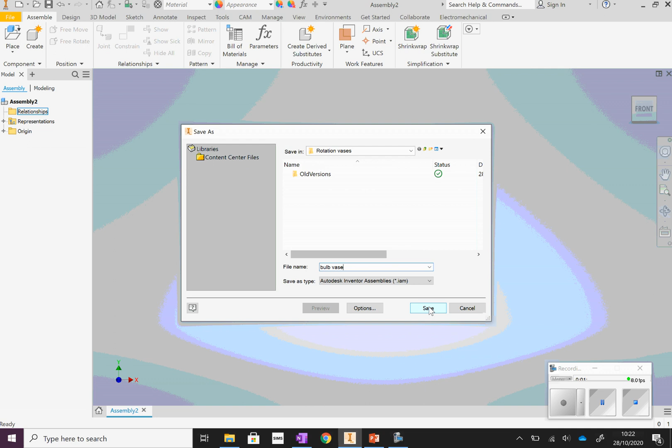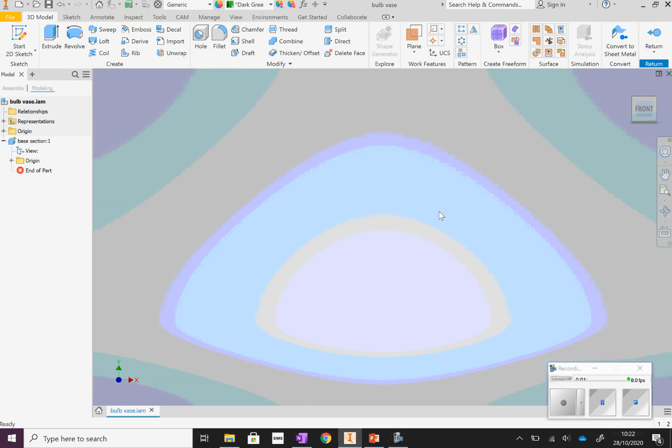There we go. So we're going to create 2 separate pieces. The first piece we're going to create the base, so I'm going to call it base section. Make sure it's saving into my rotation vases area. And remember, when you see the little sketch icon, click, and it will come up with your section here. So start a new sketch.

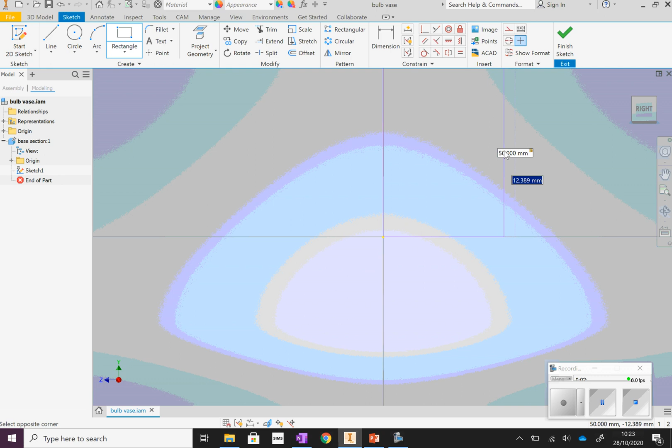I'm going to draw on the side. It doesn't really matter what shape you do the base section in. What does matter is the top bit, but I suggest we go up by 50 millimeters high and then do the width. Remember, it has to be a maximum of 30 because it's going to rotate and become 60 around.

So this section here is what we can draw inside. Remember, you've got to leave a flat bit at the bottom for it to stand on, and we also need a flat bit at the top so that we can have our top section slot into it.

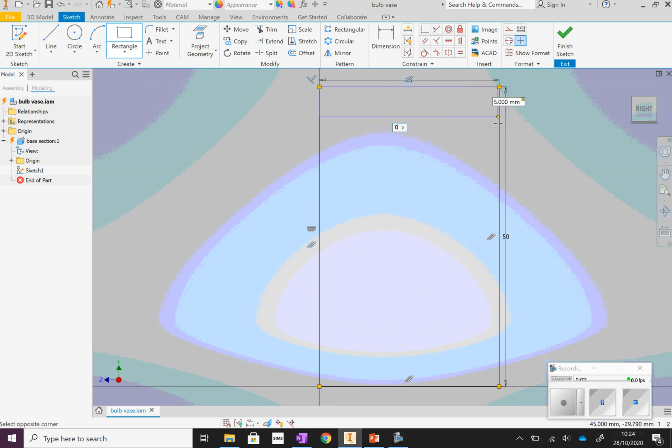So what I suggest you do is click in this top left corner here and then come down - you see the blue dimension changing at the top. I would come down by 5 millimeters and then make sure that says 30. So we're going to leave this section as a flat section that comes down here so that we can then slot the top bit in and it'll make it nice and easy to join up.

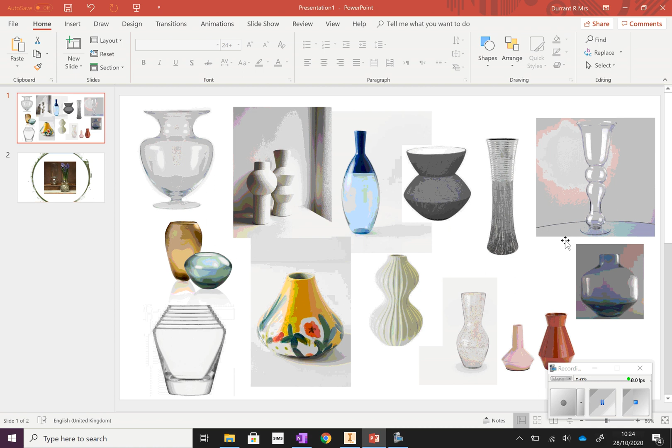Okay, so we could do all sorts of different shapes. This one is a circle. It doesn't have to be turned into a circle - you could turn it into one of these squash shapes, something square. It's up to you, though it's not very much space.

I think what I'm going to do is make mine into a more interesting shape. I'm going to go from this bottom part here out to about the middle, and then go from there. If you hover underneath that dot, it shows you a little dotted line - that will help if you want to make it symmetrical, so you can go across at the bottom and it'll show you the dotted line so you know you've got them the same distance from the side. I'm going to do that and make mine a little bit interesting.

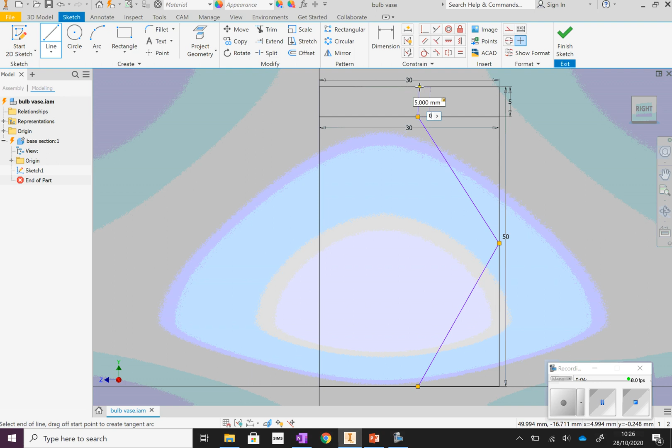Now, wherever you end up here across the top, go with your line tool from there straight up - it wants to be 5 millimeters, the same as the side. Can you see here it says degrees? We don't want it to be wonky; for it to work, it needs to be perfectly straight up, so you want to set that to 0 degrees. That will give us a nice straight edge for the top section to slot down into.

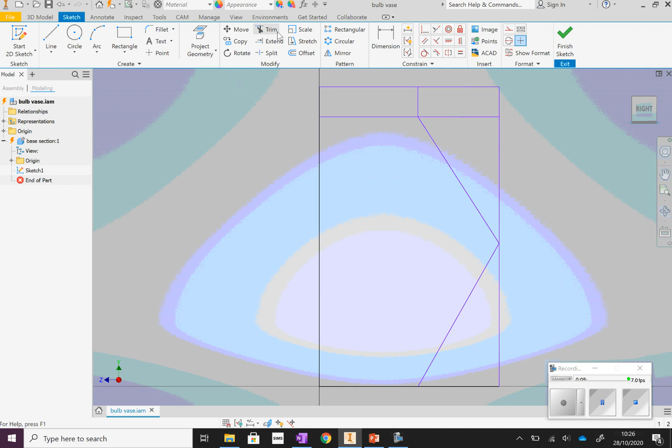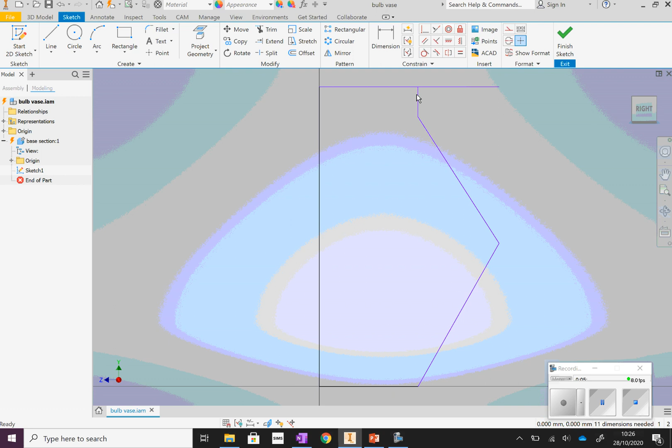Okay, so let's start trimming the excess away. Not sure why it's doing that - let's see if it behaves when we go on to do the revolve. I don't know if it will or not.

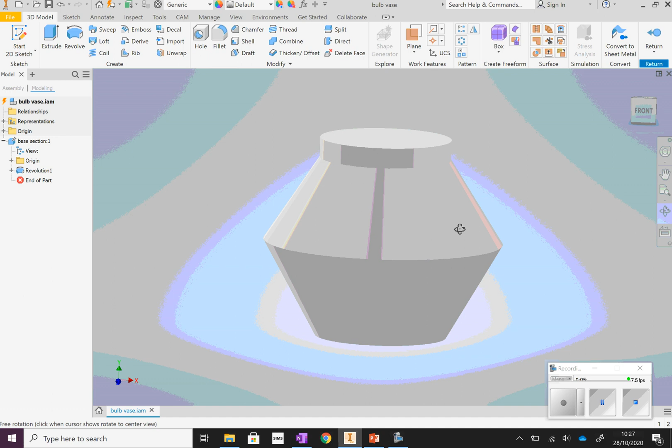Yeah, it's working anyway. So we're going to revolve that profile, and the axis is going to be this centre bit. There we go. So this is my bottom section - if you look at this again, this is the equivalent of this round part here.

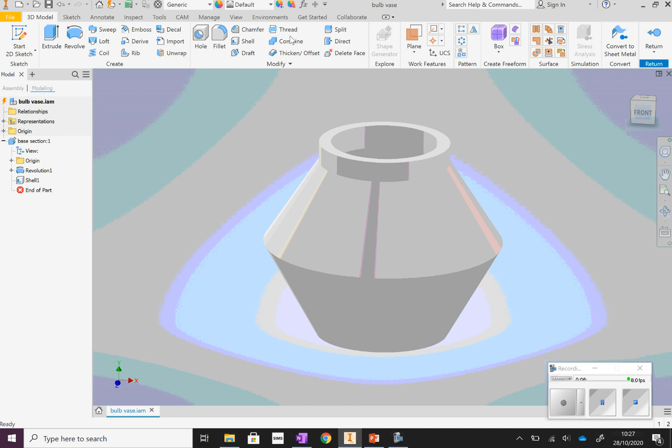And we need to shell the middle out, so 3mm, and we need to make sure that this is nice and easy to see through. So I'm going to set it to one of the clear colours.

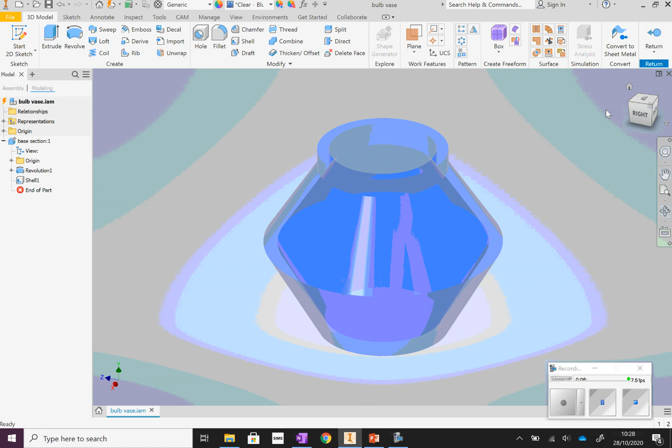Okay. So that is my awesome see-through base section. Now we're going to make the bit on top for the bulb to sit in. Right, so I've skipped ahead a little bit here. So I pressed the return button and I've created my next part. So I've called it top section and I've clicked on here.

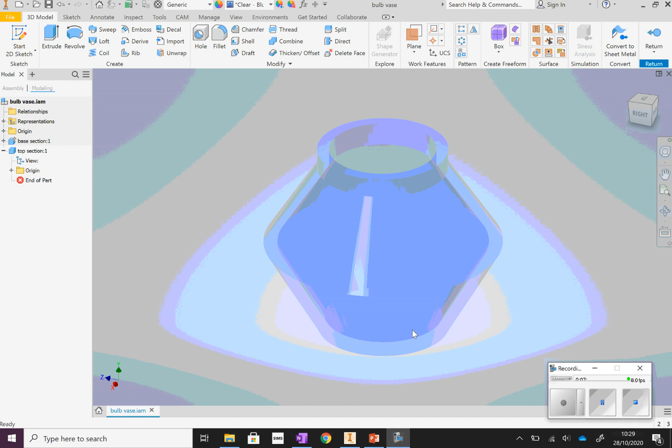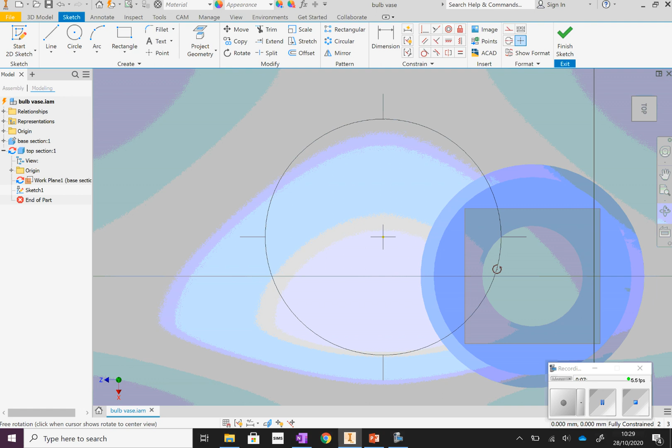And as you can see, I can still see this bottom part. So we can actually use that to create the top section and make it an exact fit. So you want to click on Start a 2D sketch, but we're actually going to click, rather than on this set of planes, on the actual product itself, on this section here. There we go. So this is us drawing. If I flip it, we're drawing on the top of the base section.

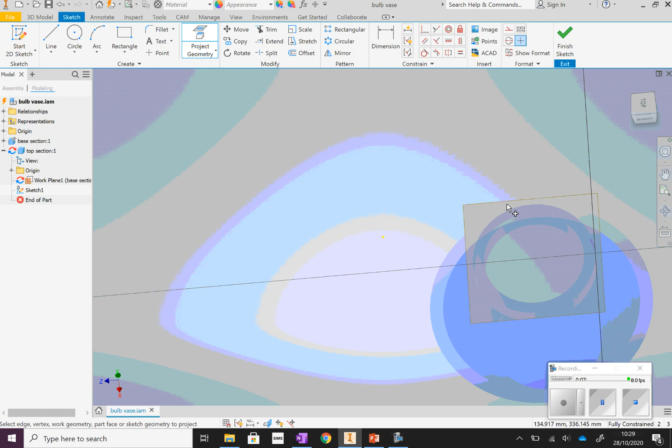And we can use this tool up here called Project Geometry to steal lines off this bottom bit to make it exact. So if you click on Project Geometry, you can see we can steal these lines here. And the one we want is the internal bit, the inside of that circle. So if I show you here, you can see that what we're going to do is make something that fits inside here. So click on the inside of that section, and then we need to create a slightly bigger area around the outside so that it doesn't fall in.

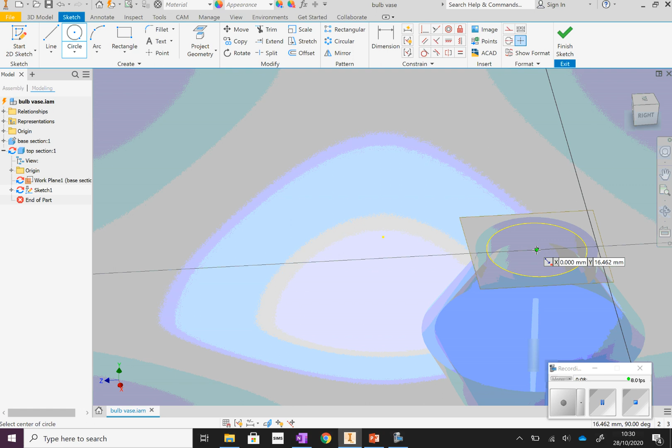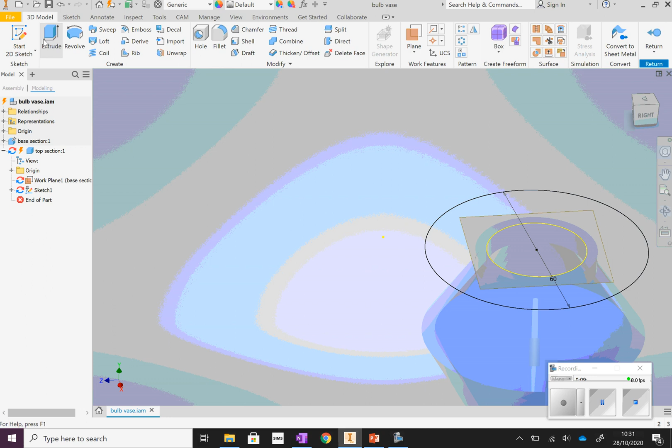So I'm going to create a circle. Make sure you hover over this middle bit here so that it is exactly in line with that circle. So you want to wait for the little green dot to show up. Click, and then we're going to type 60mm because that's the biggest size we can get. Okay, now that is going to be our bottom section. So I'm going to click Finish Sketch. I'm going to extrude this, but I only want you to extrude it by 3mm.

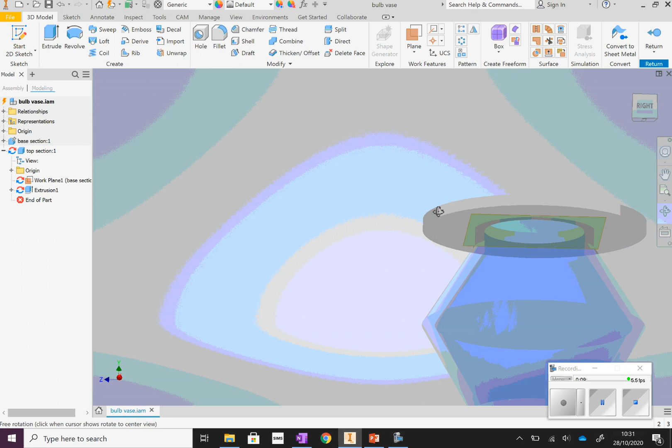Now that, as you can see, fits exactly on top. Okay, what we do need though is to make a section that slots down onto the inside. So start a sketch, we're going to draw on top, and we're going to steal that line again. So Project Geometry, we want the inside of the circle, but this time you're going to do an offset line. Now offset exactly copies this, but you can set it to a different dimension. You can drag it like this, look, or you can just type a number in. So we want to type 3mm and press OK.

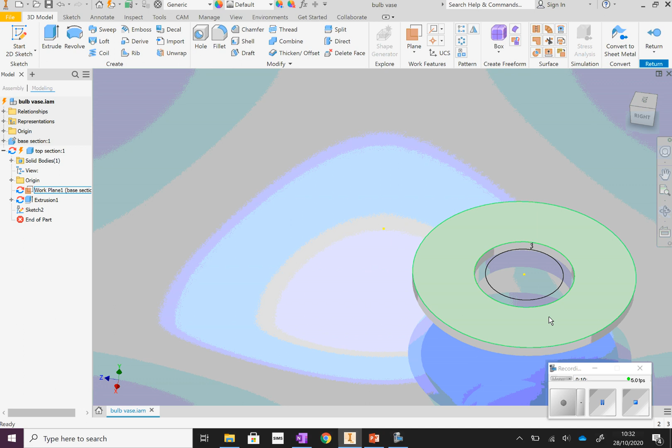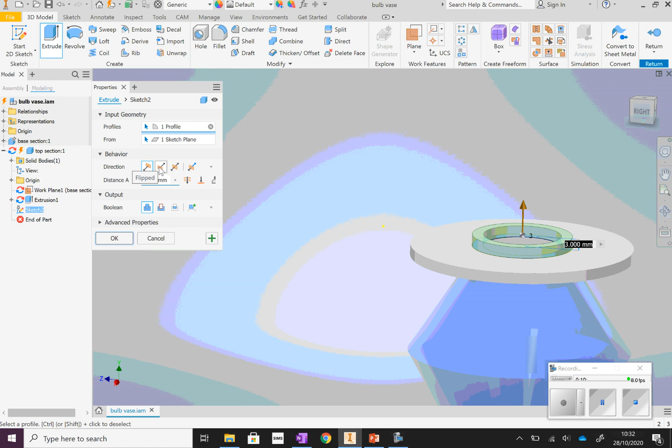Now this, once we extrude it, we're going to shoot downwards into the bottom, and that will make our slot. So if I go sideways here, if you are on extrude and you select that middle section, we don't want it to go up. Can you see the direction the arrow is? That's not what we want. We want it to go down. So these direction arrows here change the direction. If you look, we can flip it so that it adds material downwards instead.

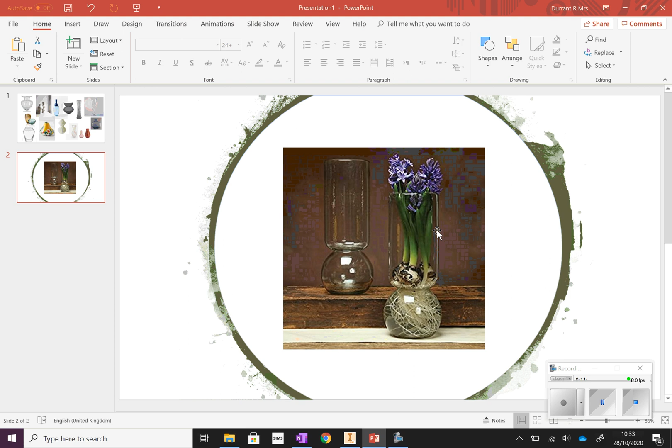Okay, we don't want it to be 3. Remember that straight bit that we made earlier was 5, and that will join up nicely. So if I zoom out, that is this section started and the bottom section done. Now we're going to draw on top of this to make the top bit. So we've got the bottom section done, and we've got a flat bit here for our bulb to sit on. So we're just going to make it go upwards a little bit so that it's got like a little something to sit inside. So start another sketch on top of the circle.

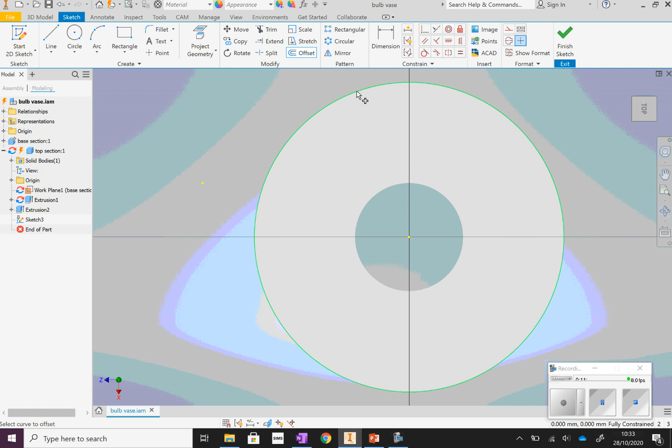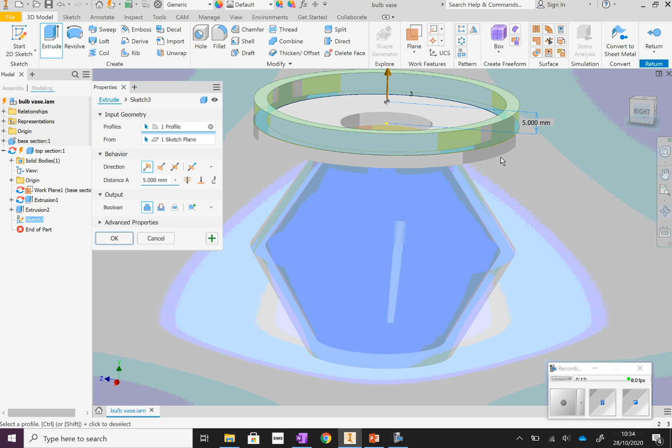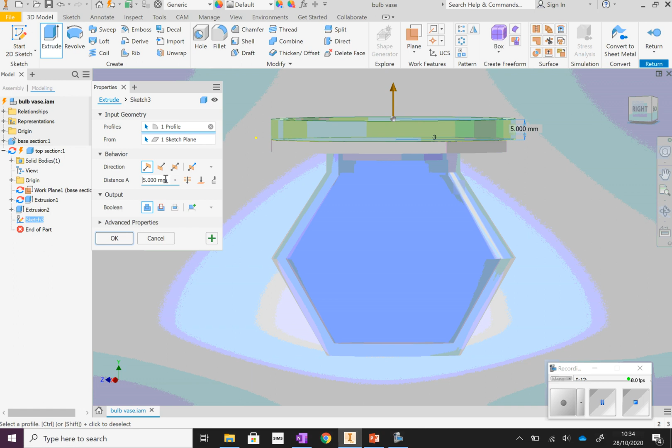I'm going to project the geometry of the outside edge and then offset it. Remember, the thickness of the material has to be 3 millimeters. We extrude that, and we want to change the height of this so that it goes up. Now remember, the maximum size we can have height-wise on the 3D printer is 150 millimeters, and we've got 5 sticking down into this already. So the height of this is already 5. The maximum height you can do on here is 150, take away 5, so you've got 145. I'm not going to make mine that big. I don't think it needs to be that tall. I'm just going to make mine 5 centimeters tall.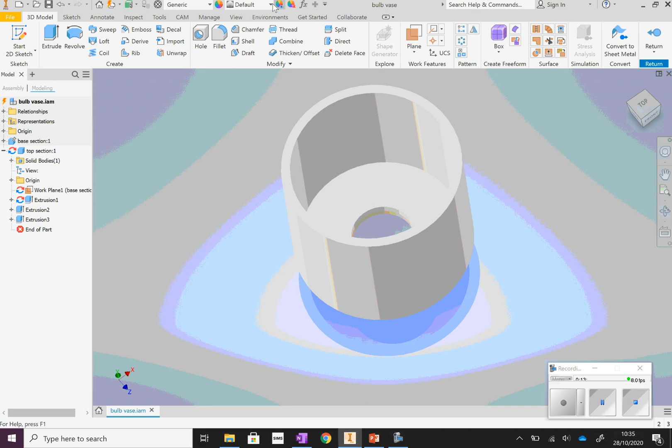Oh, it looks a bit like a lamp. There we go. That's my top section and my bottom section done that will slot into each other so I can have a little bulb. Let's change the colour on that one so you can see it a bit better. There we go. So top section's yellow, bottom section's blue. And those will be our 2 parts that slot together to make the bulb.

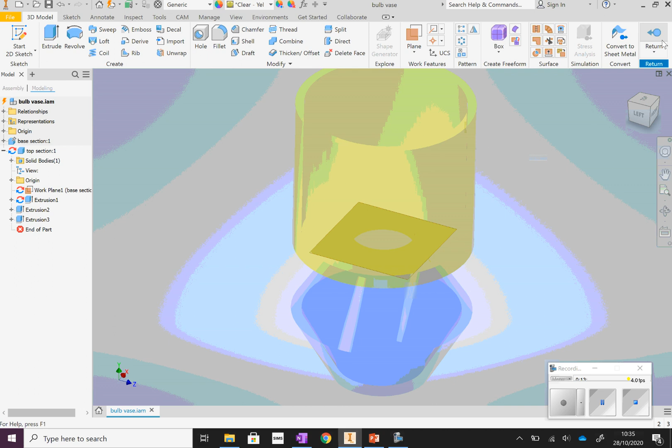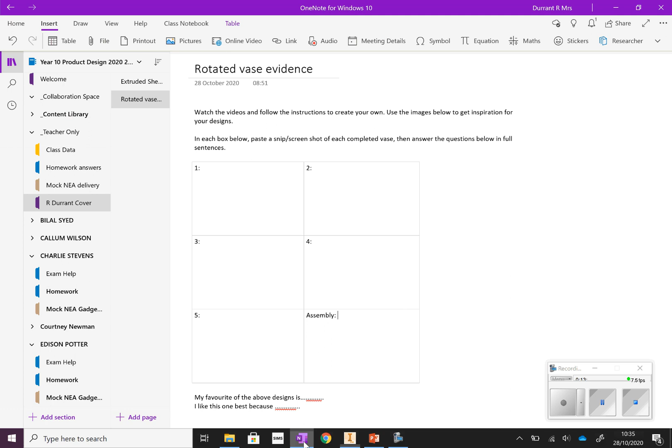Click return, and then it will allow you to save your work. Remember, yes to all and OK. And that will have saved into your area. So put a screenshot of this once you've rendered the top and the bottom section into your OneNote area where it says assembly, and then fill in the bottom sections for me.